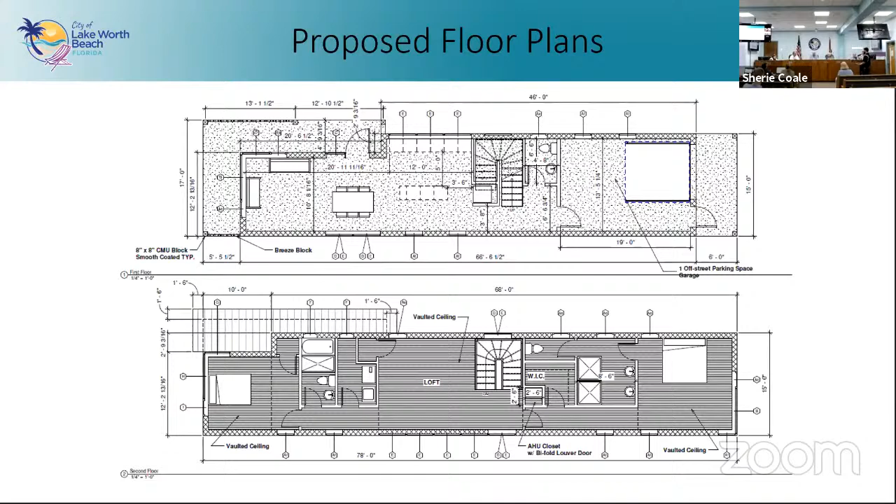Are you retaining the tree in the front? The sea grape tree, yes, a large tree, will be retained, as well as the cactus up front.

This is none of my business, but I would suggest you go to an 8-foot entry door. You have a 6'8" door and a 10-foot ceiling on the first floor, so just for proportion, you'd be better off with that.

Agreed. At the same time, you might want to look at the head heights of your windows. Again, with a 10-foot ceiling, you don't want to feel constrained in your view. None of my business, but are the side windows fixed or casements?

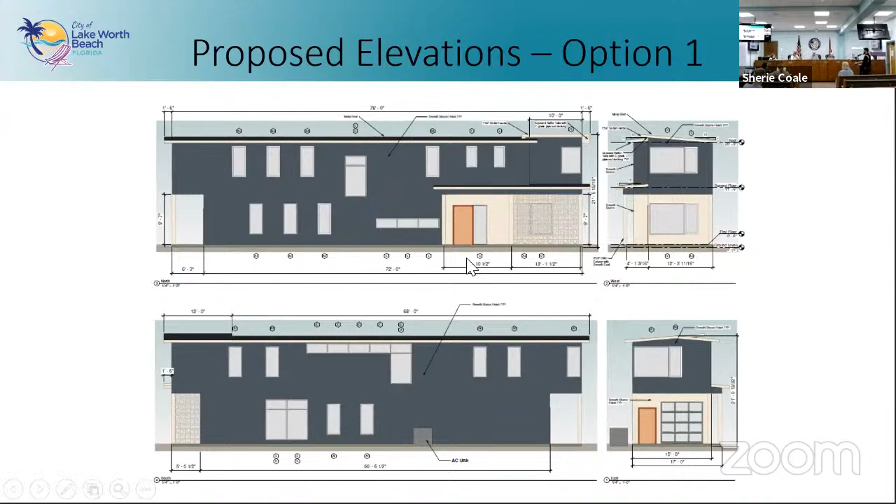Next question: did you have a particular reason you wanted that entrance walkway centered rather than centered on the front door section? I'm not sure I understand the question. The walkway appears centered on the site as opposed to being centered on that little porch opening to the front door. Oh, that's the existing walkway. I think based on Abraham's calculation of the front yard, we're going to have to reconsider how we're doing that anyway.

What do you think? Like this guy, I would have you move it over so you have a straight shot at the front door—it's a little less impervious too. Yeah, and then the little front walk is centered.

My last comment is the same thing Mr. Harris said. I think EPDM membranes come in 16-foot widths, so if you wanted to just buy a roll of EPDM and roll it down over the roof, you should be in good shape.

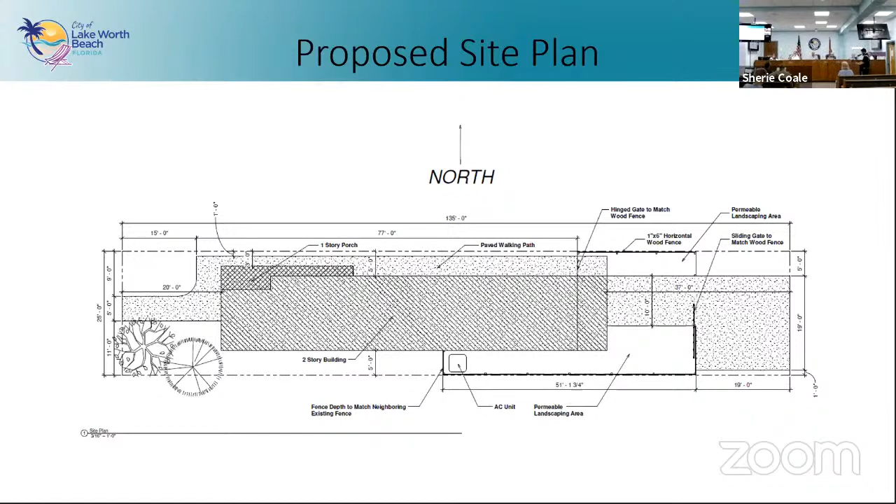Okay, comments from neighbors, from the public. I have the comment they spoke about earlier. It starts off by thanking Historic Preservation, the Historic Resources Preservation Board, and the Department for Community Sustainability in Lake Worth Beach, particularly Aaron Sika and Abraham Fogel. It is a credit to these individuals and to Garrett Scheffler for collaborating to create a distinctive mid-century modern style property at 224 North L in the North Lucerne Historic District.

The 200 block of North L has a significant mix of multi- and single-family homes. I live at 222 North L Street in a Mission Revival home directly south of the proposed home. I credit Mr. Scheffler for coordinating with the city to find a distinctive but contemporary style. The adjustments from the original concept drawings show great appreciation for mid-century refinements, especially with respect to the view of the front from the west.

Especially with respect to the view of the front from the street, the breeze blocks and matching top and bottom windows showcase that refinement. The narrow lot size of 25 feet left little option but to build vertically. The pitched shed roof may help the design look less like stacked container boxes and more mid-century.

I hope the board agrees that the roof will help set the style of the home. A pitched roof is also a mid-century modern characteristic and of consideration with one of the two proposals. I value the opinion of the board in finding suitable pitch, material, and color recommendations.

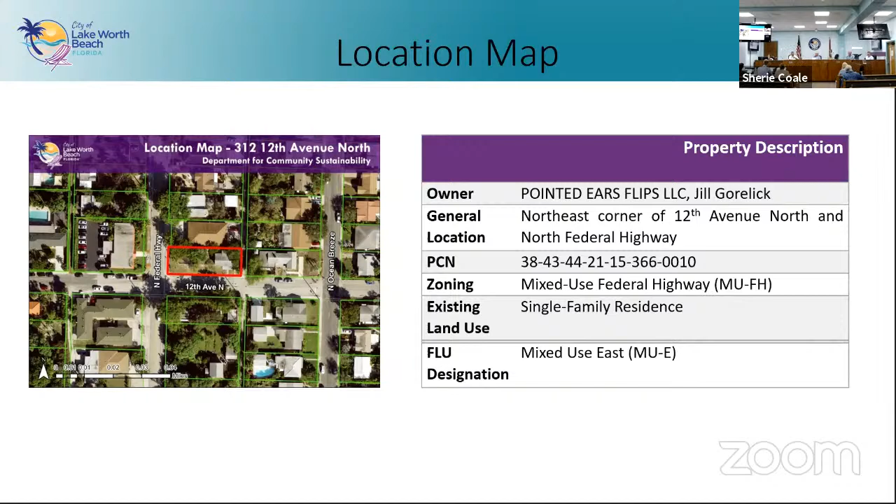The property owner is Pointed Ears Flips LLC, and again, this is a corner lot located on 12th Avenue North and North Federal Highway. This property is located in the mixed-use Federal Highway zoning district, but it is a single-family residence with no intended change of use.

A little bit of property file documentation. There were originally two structures on the parcel, built between 1925 and 1938. Then also in 1938, an integral garage was added to the existing structure, that rear structure, which we still have today fronting 12th Avenue North.

But the front building ended up being demolished due to some fire damage. Then in '76 there was a major renovation to that rear building, which included removal of the garage, roof replacement, window replacement, and interior renovations and reconfiguring of the floor plan. So the building has been substantially altered over the years and maintains a relatively low degree of historic integrity.

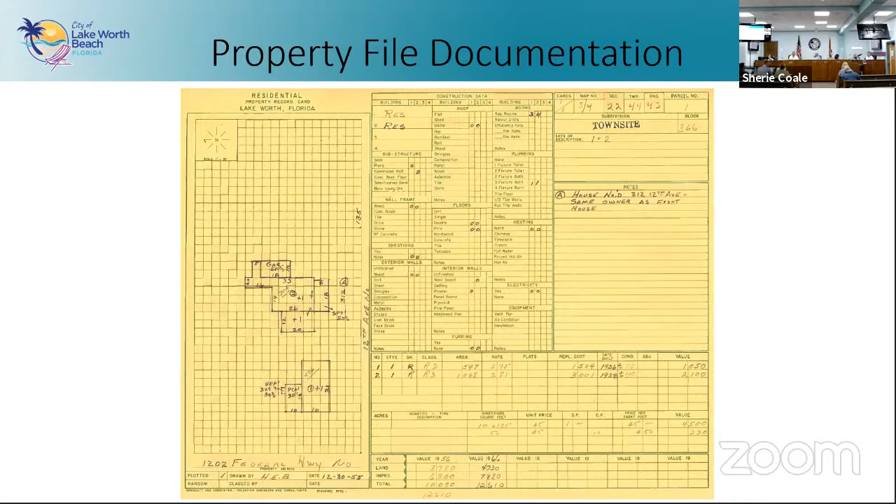Sorry, it just stopped showing. It just stopped moving. Must be the weather, it was still raining. Just get a brownout, blackout. Power goes out, we're stuck in the city.

So this is the proposed site plan. The parcel is a 60 by 135 platted lot of record. If you look at the site plan, you can see the diagonal filled portion — that is going to be the addition. The speckled areas on the south and west sides are going to be new open porches.

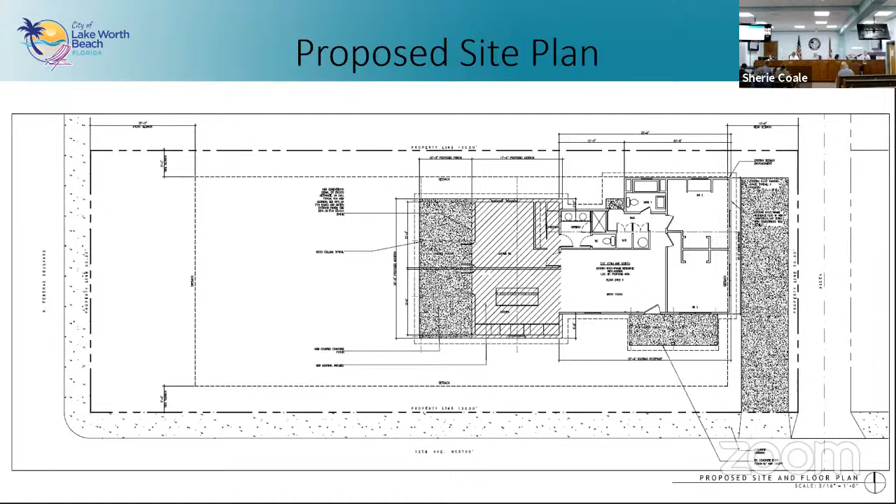So the proposal also requests to replace all of the existing aluminum siding with new cementitious lap siding, and to replace the 1970s metal single-hung windows with new impact single-hungs. The window and door surrounds are also proposed to be replaced with new cementitious trim and sill. Per the design guidelines, these alterations could be approved administratively by staff with pertinent conditions of approval.

The request also proposes to install a new porch over an existing slab at the current entry on the south elevation. The design of the porch is pretty simple, just supported by 3 columns. Here you can also see the proposed addition, laid out in a cross gable configuration. The addition is relatively simple in massing and features a broad front porch fronting North Federal Highway.

The applicant is proposing 2 different siding treatments for the addition. This one is a proposed board and batten. Again, the existing building will be done with new cementitious lap and then board and batten for the addition portion. You can see the new impact windows — it's just a 2-over-1 design.

These are a few angled shots of those buildings, and then some of the contextual streetscape around it.

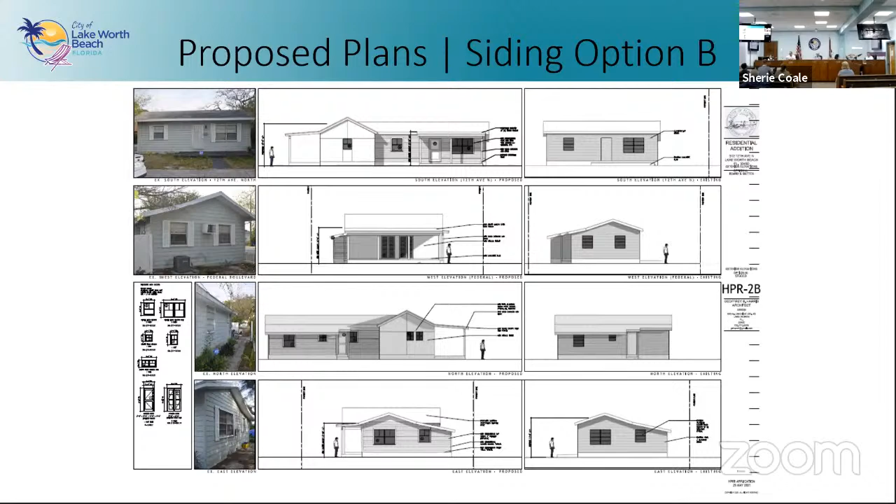Yeah, that's fine — so alterations and additions that are visible. Staff has provided answers for the general criteria on granting COAs on pages 5 through 6 of the staff report. For non-contributing buildings, there are only 2 additional criteria for additions, dealing with what's visible and the general massing. Alterations and additions visible from a street for non-contributing buildings shall be reviewed only for compliance with the LDRs, and whether the addition or alteration's height, mass, and orientation to a public street are compatible with neighboring buildings in the district, and whether major changes include design and materials compatible with the district as a whole.

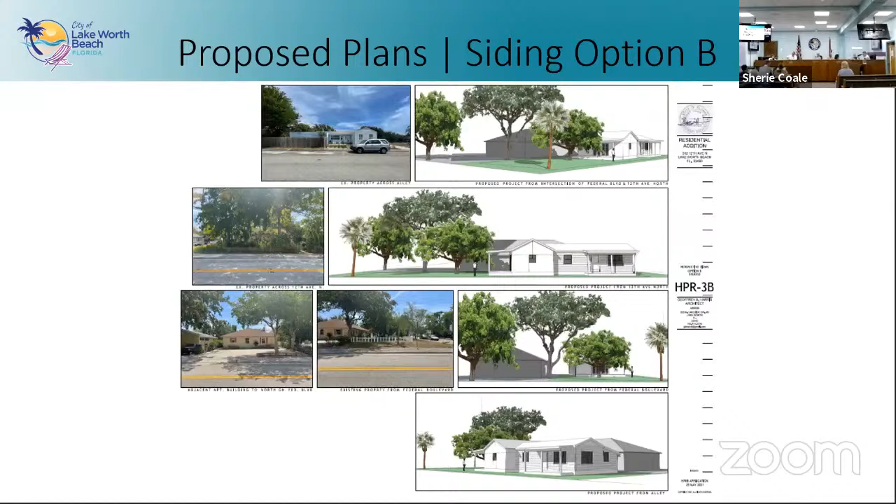So in order to maintain that overall integrity for the architectural style, staff is recommending siding option A, as the board and batten is a compatible siding material for frame buildings. Option B, the proposed scored stucco, doesn't really maintain that styling around the building. Go next.

Here again, you can see options A and B. A is going to be the board and batten look, and then option B is going to be that smooth scored stucco.

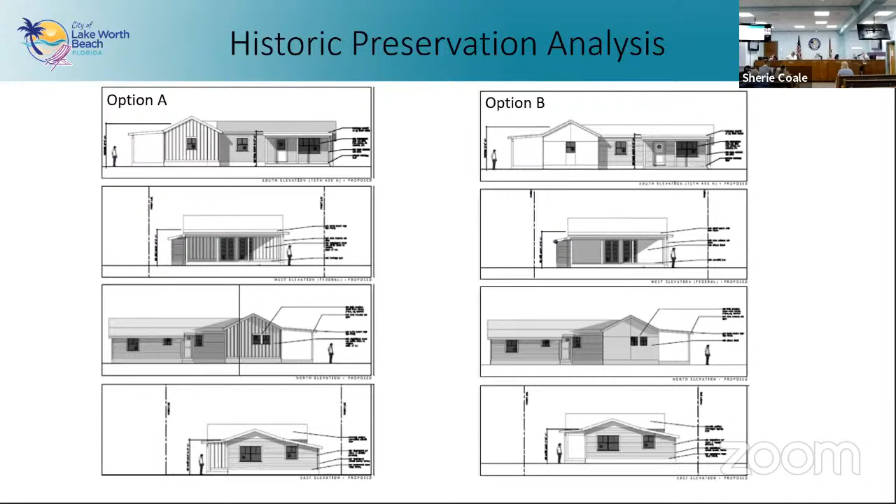Is one considered more maintenance friendly than the other? I mean, they're both pretty flush — there's not a whole lot of reveal to either of them. Board and batten, well, it does have a protruding piece to it, but if you're thinking about how things usually get dirty, it's when things stick out horizontally, not vertically. You can talk to the architect about that. Is the board and batten a concrete composite or wood board and batten? Was it composite, or — yeah, all cementitious. That's what I thought you said. I just wanted you to say cementitious again.

Okay, for conclusion, it is generally consistent with the LDRs and the design guidelines. We are recommending approval with conditions. You can go ahead and start with the applicant, or we can get into the conditions of approval.

Let's go through the conditions. Okay.

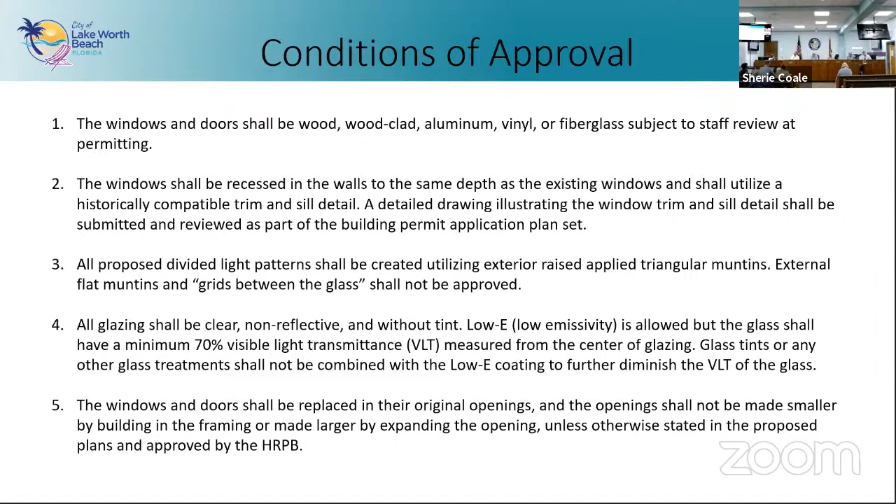Number one, windows and doors: wood clad, aluminum, vinyl, or fiberglass — review of permitting, I believe aluminum are proposed. Number two is to recess the windows and provide a historically compatible trim and sill detail. Number three is our standard divided light pattern or divided light profiles. Number four is our glazing standard. Number five is that the windows on the original building are replaced in their existing openings unless otherwise approved by the HRPB.

I don't think those are really proposed to be moved around a lot. Next page, Aaron. Our typical glazed door glazing is a little bit different than our window glazing, but still, if you're using a low E, it's a 70% VLT.

Number seven is our lap reveal, which is typically 6 to 7 inches. Number eight is the siding material, and we're recommending approval for the board and batten option. Number nine is the dimensional asphalt shingle roof, and again we're recommending the light gray or white option.

Numbers 10 and 11 are just recommendations. Flip to the next one, Aaron. Number 10 is that two window type A's be added to that west federal front facade. As it is now, it's just the two doors on that facade, which we don't see a lot of. So it's just something to break up that facade, but again, that's just a recommendation.

Number 11 is to just use a more consistent divided light pattern, again just a recommendation. Right now it's just a 2 over 1 proposed in every opening, but typically when we saw that and the windows would change width or height, those light sizes would stay proportioned. So maybe some of the windows would be 2 light, some would be 3, some would be 4.